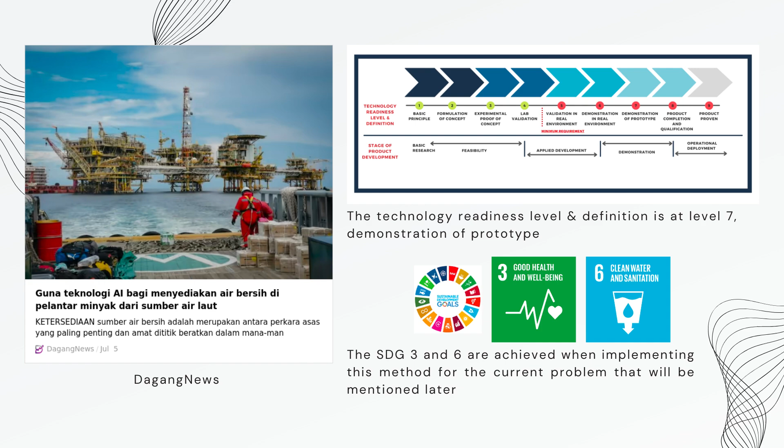Therefore, the technology readiness level is at level 7 for this method, since it demonstrates the prototype through a picture for visualization. In support of Sustainable Development Goals (SDG) 3 and 6, this method will reduce time consumption and incurred costs, as it is a rapid solving method with accurate and verified results or output. This study also had a technical reference from the MOU engaged company BOSE Sendirian Berhad with UiTM, which will possibly be a good reference for the oil and gas industry. This study has been registered with the Intellectual Property Corporation of Malaysia, known as MyIPO.

Now, I want to present one of the studies from the MOU, titled Computational Fluid Dynamics (CFD) Study on Mechanical Losses for Desalination Water Distribution System at Oil Rig Platform Facilities. The oil and gas industry, especially offshore, has faced a shortage of fresh water due to high usage of clean water for certain operations such as drilling or production processes. Normally, offshore service vessels (OSV) that deliver and transport the water supply from shore to the platform have faced problems due to breakdowns or waiting for suitable weather conditions.

This challenge can be solved by installing a desalination plant, where reverse osmosis is the common purification technology that requires 1,200 psi of operating pressure. The seawater has to travel through piping from sea level to the desalination plant with 110 feet of elevation, where the 90-degree elbow has the highest pressure drops compared to other fittings, as a piping system consists of branching T, valve, and straight pipe. These pressure drops reduce the operating pressure in the system. Thus, the pressure drops need to be minimized so the desalination plant can operate efficiently, where the seawater can penetrate the semi-permeable membrane more easily.

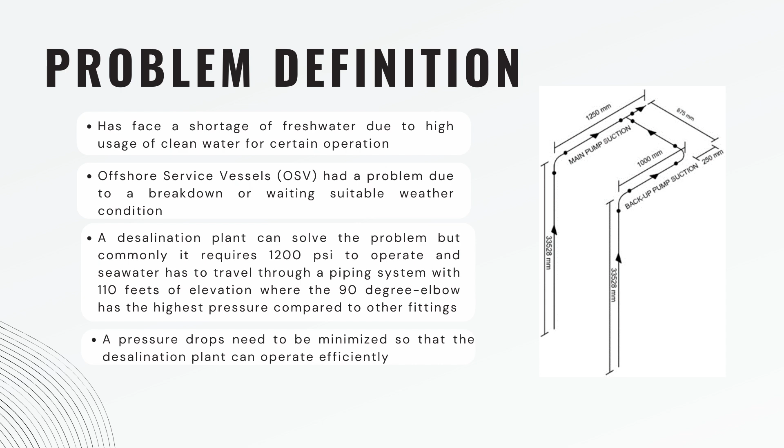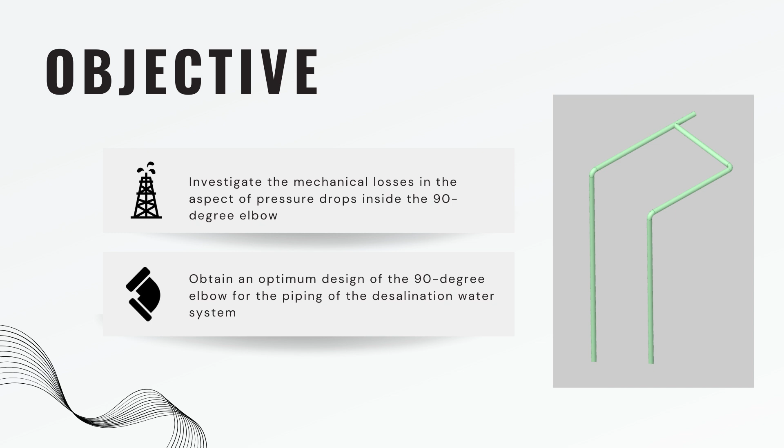There are two objectives for this study. The first is to investigate the mechanical losses in the aspect of pressure drops inside the 90-degree elbow. The second is to obtain an optimum design of the 90-degree elbow for the piping of the desalination water system. For the methodology, the selected turbulence model is the realizable k-epsilon model, which is suitable for single phase and complex flow.

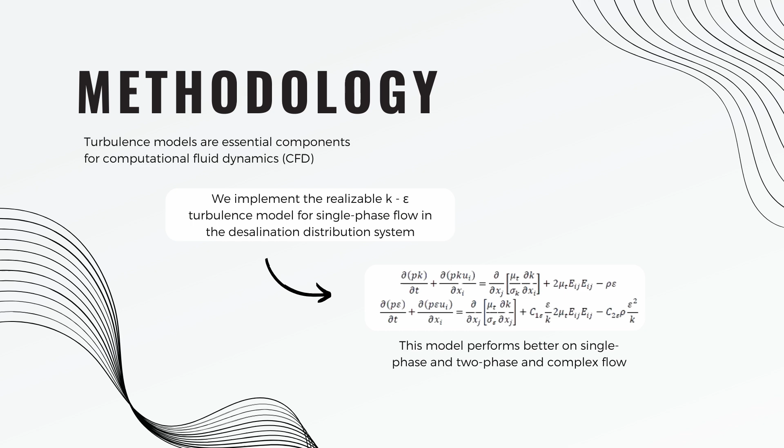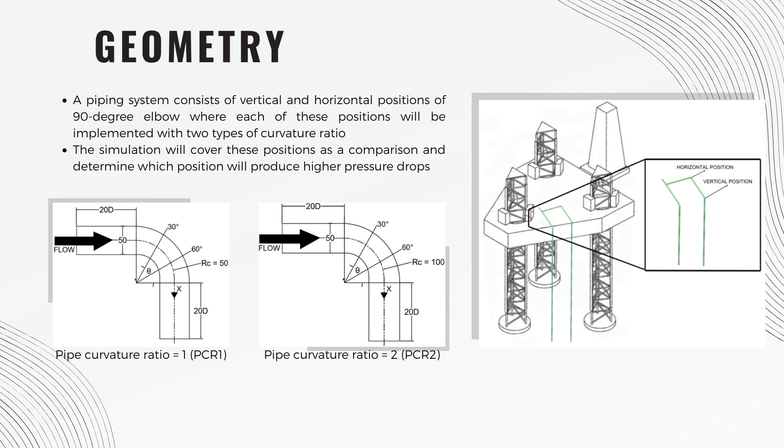A piping system consists of vertical and horizontal positions of the 90-degree elbow, where each position will be implemented with two types of curvature ratio. This simulation will cover these positions as a comparison and determine which position produces higher pressure drops. There is no study comparing vertical and horizontal positions with different curvature ratios and Reynolds numbers, especially for water desalination piping systems with seawater as the fluid medium.

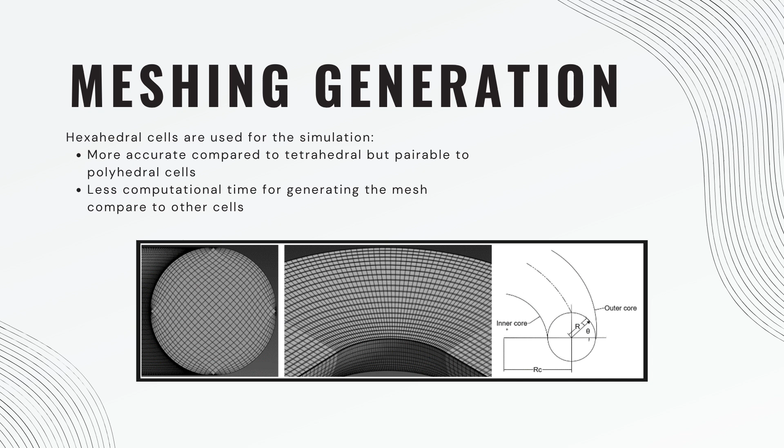After designing the geometry in computer-aided design (CAD) software, the model is transferred to the Computational Fluid Dynamics (CFD) software to generate the mesh for each model. Hexahedral cells are used for the simulation, since hexahedral cells are more accurate compared to tetrahedral cells, but comparable to polyhedral cells, and hexahedral cells have less computational time for generating the mesh compared to other cells.

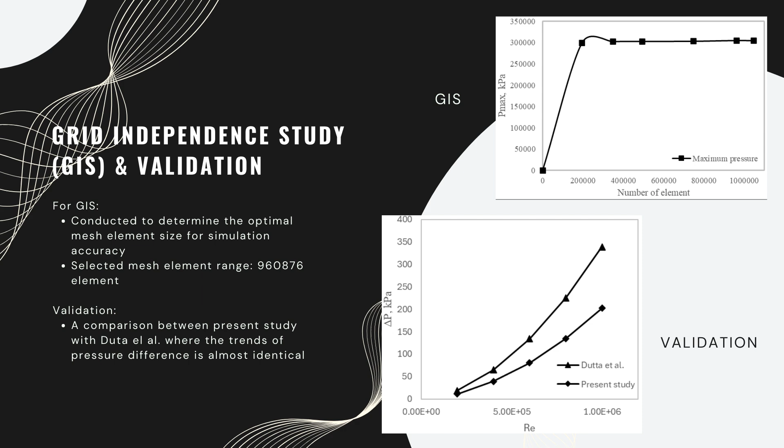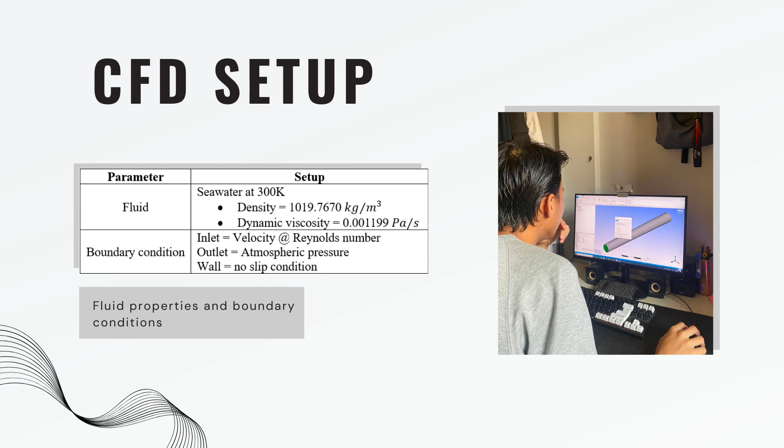After conducting the validation, the CFD setup is taken, where the fluid being used for the simulation is seawater at 300 K with a density of 1019.7670 kg per meter cube and dynamic viscosity of 0.001199 Pa·s. The boundary condition: inlet is set to velocity, outlet is set to atmospheric pressure, and wall is set to no slip condition.

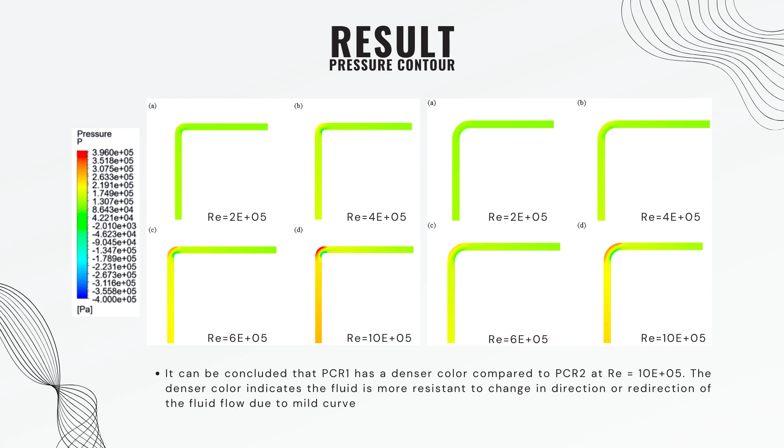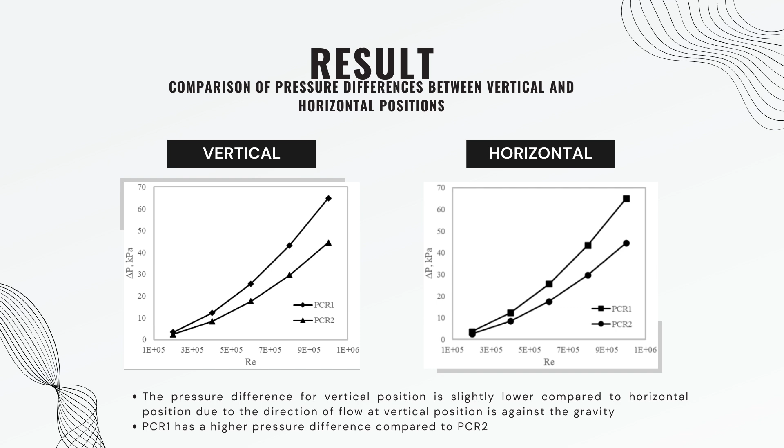This is the comparison of pressure differences between vertical and horizontal positions. The pressure difference for the vertical position is slightly lower compared to the horizontal position due to the direction of flow at the vertical position being against gravity. It can be summarized between vertical and horizontal positions that PCR1 has higher pressure drops compared to PCR2.

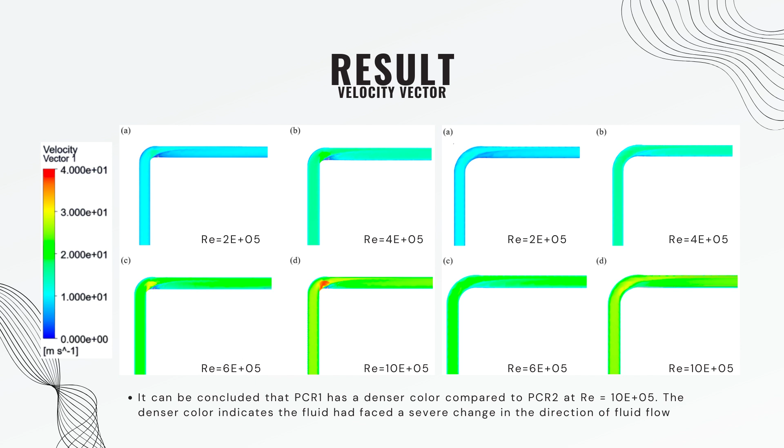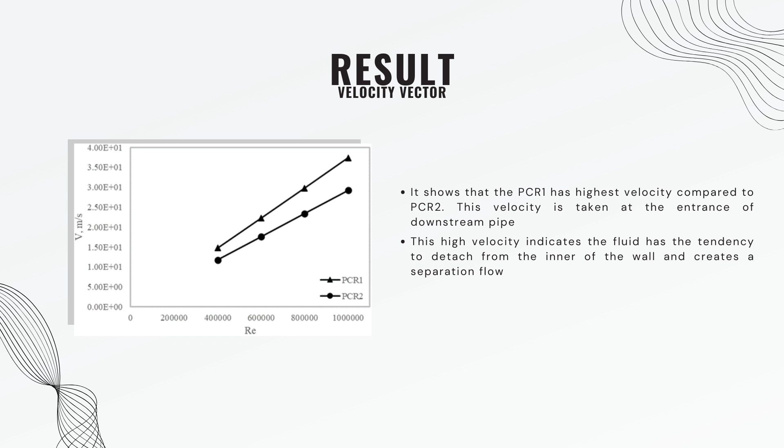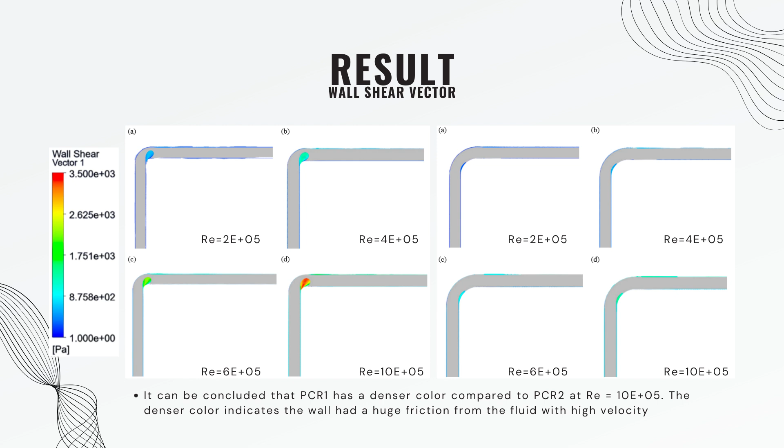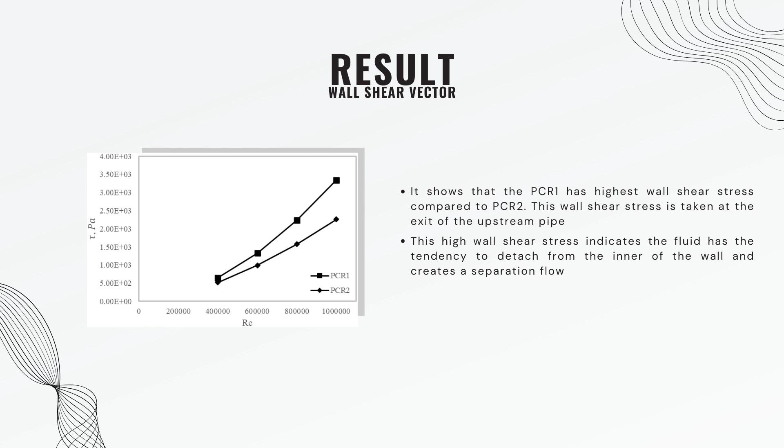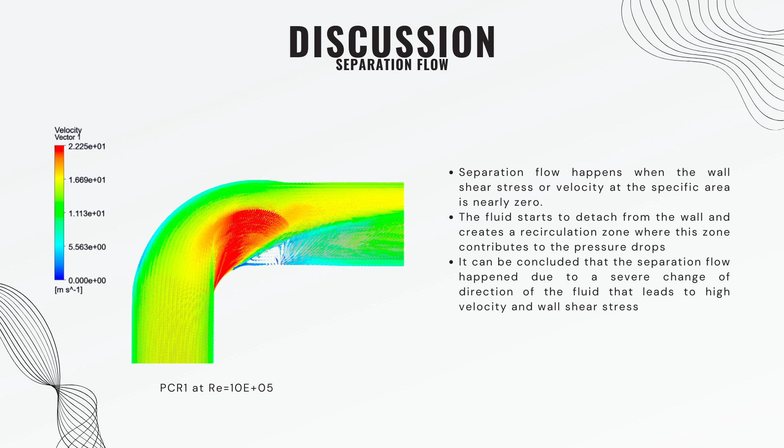For the discussion of the result, the separation flow happens at PCR1 at Re equals 10 times 10 to the power of 5 when the wall shear stress or velocity at the specific area is nearly zero. The fluid starts to detach from the wall and creates a recirculation zone, and this zone contributes to the pressure drops. Since this zone has become an obstacle for the fluid to travel inside the pipe, it can be concluded that the separation flow happened due to a severe change of direction of the fluid that leads to high velocity and wall shear stress.

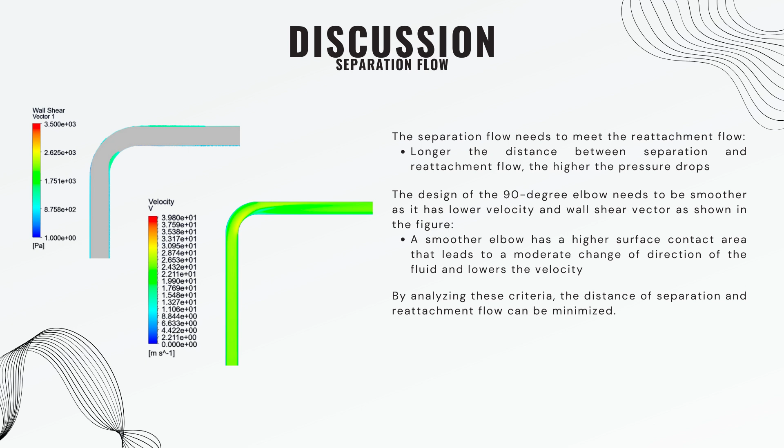The separation flow needs to meet the reattachment flow, since the longer the distance between separation and reattachment flow, the higher the pressure drops. The design of the 90-degree elbow needs to be smoother as it has lower velocity and wall shear vector, as shown in the figure. This happens because a smoother elbow has a higher surface contact area that leads to a moderate change of direction of the fluid and lowers the velocity. Thus, through analyzing these criteria, the distance of separation and reattachment flow can be minimized.

In conclusion, PCR2 is the recommended and selected geometry due to its ability to maintain smoother flow and low pressure drop, contributing to higher overall efficiency in the system. Thus, this geometry can adapt to the work environment up to Re equals 10 times 10 to the power of 5. Thank you.